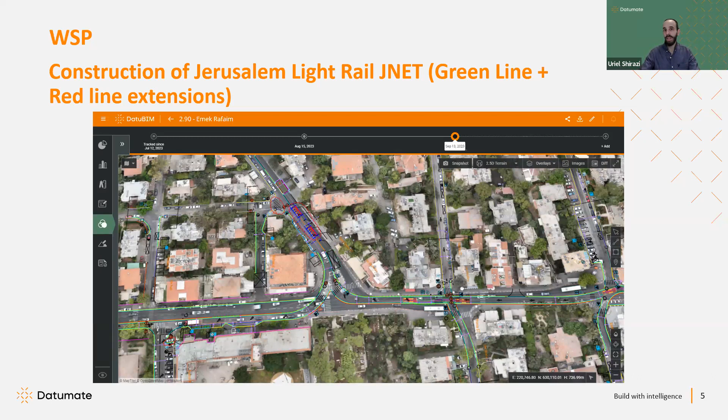WSP contacted us, Datumate, since they wanted a solution that could help solve or prevent construction errors. They wanted one platform that would be future-proof against clashes and claims, which is a big issue, as we hear from customers. And by showing a consistent view of what is happening on the job site, they were thinking that Datumate would be the tool for them.

Before I start with the real use cases, I'll share a quote from one of the power users in Datumate, Asaf Yaffe. He is one of the project leaders. He's also a civil engineer. He was, or still is, the control manager at this project. And he was telling us: working with Datumate has been a great experience. It's an open conversation between us and the company.

If I have questions, it's a very thin wall, and I can share ideas and concerns, and in one minute I have answers. We're looking forward to using Datumate more across our next projects and introducing it to our wider team across Israel, continuing to spread the gospel. And indeed, we are now starting to work with WSP on more projects. In addition to that, we also see our customers as partners. We work with them together with our customer success managers and solution engineers. They are becoming one part of their team and really an integral part of the project.

Hey, Uriel, I had a question about your experience with WSP. What's your secret for engaging with the civil engineers? I've always found that that's the hardest part. I agree. Everybody is super busy in their day-to-day.

And I think that for us, as civil engineers and people that come from the site and know how to provide better solutions and automations, just sharing our knowledge and sharing all kinds of ideas that can help our customers be more efficient is the best way to engage, to approach the customer with all kinds of ideas that will help him in his day-to-day workflows. Yeah, that makes sense.

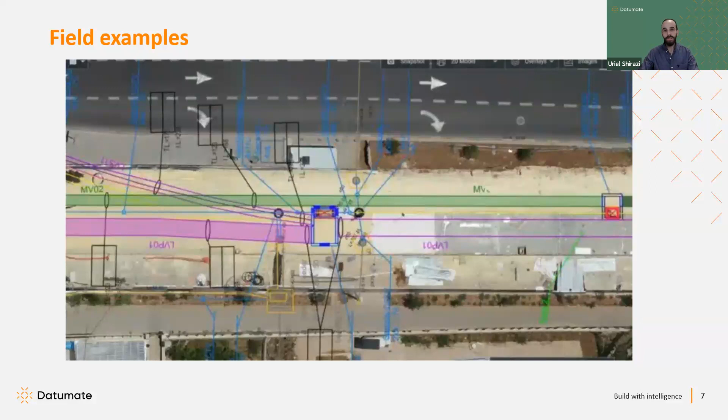So in the next few slides, we will review some of the use cases of the project. The first one is an example where the project managers or project engineers have overlaid the design of the underground stormwater. And as you can see, there is a deviation in the stormwater pit between its construction and the design. It wasn't too big a deviation to change the construction or do rework, but they could update the red lines very soon and proceed to the next stages much faster.

Instead of, as I guess most of you know, at the end of the project having this massive bulk of designs that you need to update, going over things that happened years ago. With Datumate, you can do everything on the spot and get it over with.

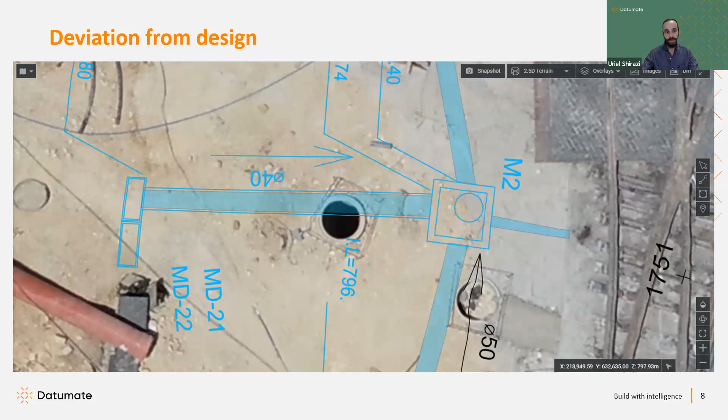Thanks to Datumate, the project team was able to construct the missing drainage channel on time rather than later, avoiding much more costly rework and delays to the project. In this case, the issue was identified by the owner that, of course, alerted the contractor. And we see that in this project specifically and in some other projects, the collaboration between the owner and the contractor becomes better, thanks to Datumate.

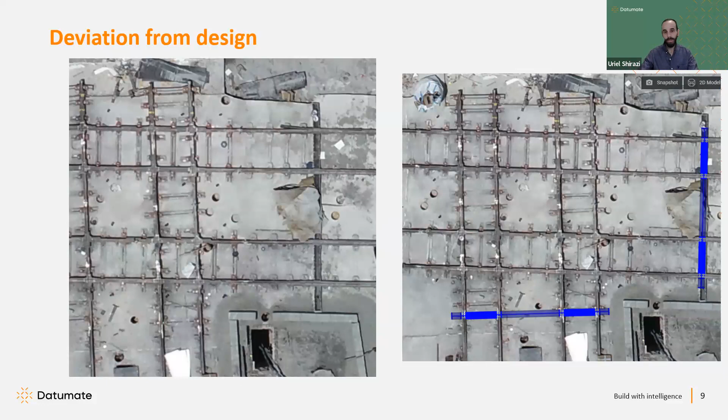Yeah, being able to overlay these traffic management plans in near real-time visualization is such a great tool. Yes, it's important also, Tom, because even if you have a surveyor on site every day, you cannot bring him to every location that you are in. And working with those designs in PDF, it's still very difficult to understand where you are when you are standing in the field compared to the design, even if you have them on your tablet. So it's still very, very difficult.

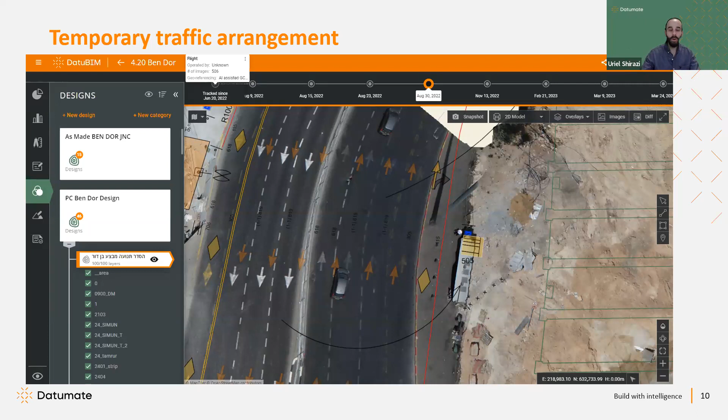So with Datumate, you can open it in your iPad, for example, or Android tablet, and then just overlay the designs, as you were saying, and just visualize the project compared to Datumate and try to understand and solve the problem on the spot. And here is another example, again, much narrower lane. In this case, we see a lane of 2.5 meters instead of 3 meters. It means that the traffic slows down, causes traffic jams more often. And again, for a project of 2.5 to 3 years, something that the city can't allow to happen.

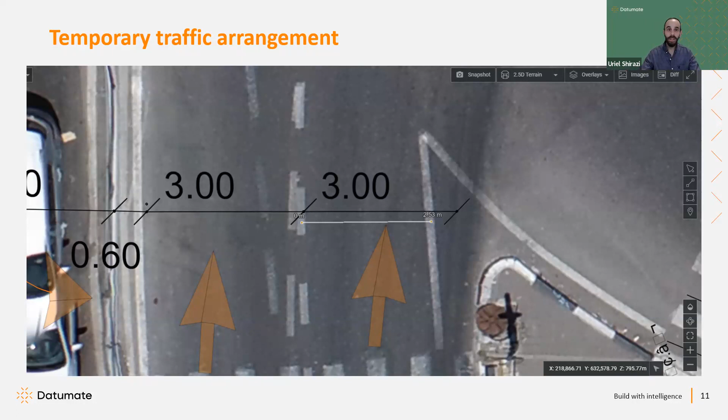As part of the project, we provided to WSP weekly and monthly progress reports as per request. These reports were given to the users within 2 days from the flight date. In many cases, we hear from customers that they get engineering professional reports, such as project progress reports, weeks and months after they had to receive them. It means that these reports have no value when they're received with a delay of a month or so.

The reports that we have provided to WSP were shared across the stakeholders of the project and the decision makers. It helped them to make much more knowledgeable decisions, fast, on time, and to be more efficient, of course, and save money, improve the quality of the project at the end of it. Such reports easily emphasize areas that are being delayed, giving the project manager critical information on time to solve problems earlier, which leads to reduced delays.

In most cases, the project managers and superintendents request such reports to track the contractor's work and to see if the work is being executed as planned and as scheduled. The contractors also benefit from these reports since they provide good indication of the work pace, enabling them to estimate when the work will be finished and manage their monthly billing in a much more clever way.

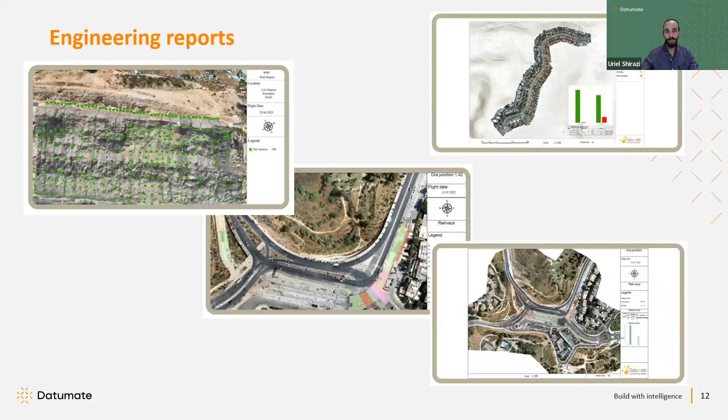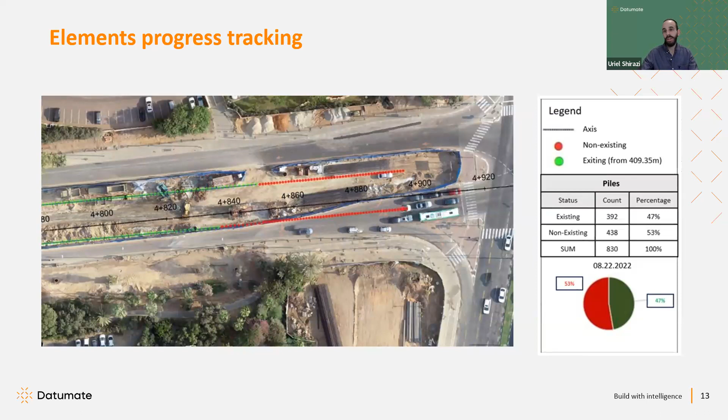And I will show you some examples of the very simple reports, but very important. So the first one is a report where we see the progress of the piles or foundations of a supportive wall, very easily color-coded and served to the user. By adding the project plan or project schedule, users can get the percentage progress and understand if they are ahead of time or late.

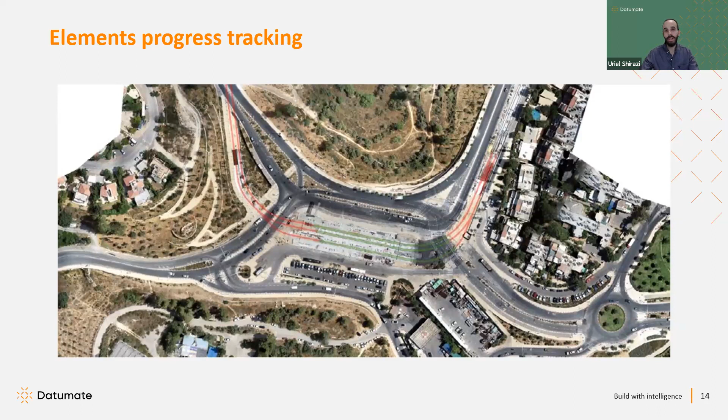The same report can be done for any element in the project, like the rail track, as we see here, or again for any other elements like walls, road furniture, and more. In this report, we see changes to specific elements between successive flights. For example, walls, color marks on the road or on the lanes of the light rail, manholes, curb lines.

The project managers get the statistics of how the contractor progressed in the specific delta time. Visualizing the changes in a very clear way gives the project manager high quality data to monitor the contractor and the construction site.

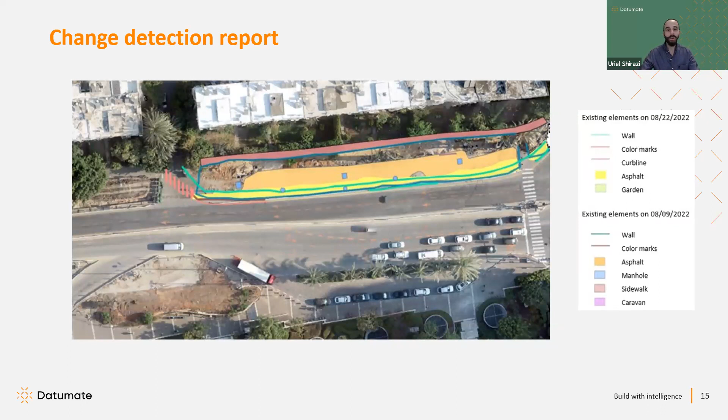Another report is excavation out of site borders. The report shows in blue the borders of the project. And the purpose of the report is to track any amount of excavation that was done beyond the project boundaries. We actually took 2 flights, calculated the delta volume between the flights in the areas outside of the blue line, and provided this information to WSP, the owner or the owner representative.

The data is crucial for the owner since it allows monitoring overpayment to contractors and protects the owner from future claims. So this is again a very, very important report. Getting it on time prevents the owner from overpaying and then starting to fight over money and payments. That's quite a headache.

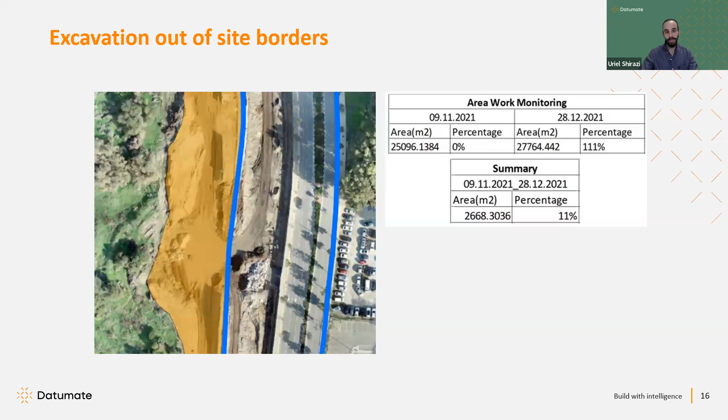Another report is for billing confirmation, and it's touching a bit on the previous reports. But one of the most demanding tasks in the project lifecycle is to submit invoices and approve them. In total, about 5 or more percent of the project budget goes to billing processes. Usually, the general contractor pays about 3% of each invoice on the work that is related to billing.

In this case, the report is used for tracking the amount of different materials that have been excavated or filled. It's a cut and fill report for different materials. It was used by WSP to verify the contractor invoices throughout the project lifecycle. Paying only for what has been done in the job site is very crucial for managing overpayment and keeping the project on time and on budget.

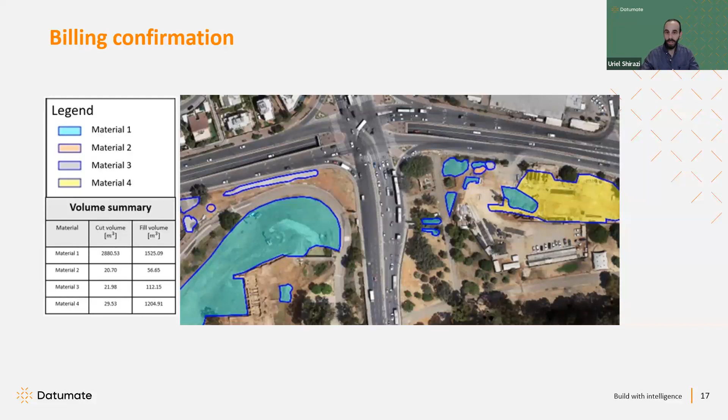With this easy and automated report, owners can save large amounts of money, especially when speaking about earthworks, which are very expensive, including the labor and the materials. So a quick summary of what we learned about the WSP project and the benefits of Datumate.

Quality control: WSP, as well as other stakeholders of this multi-year complicated project, can now log into Datumate. They can look at plans and see at a glance what happened until now compared to the schedule and to the design. It makes quality control seamless. All of them have full and accurate visibility of the job site.

Everybody can see what is happening every time, especially the ones at the office that usually do not have this opportunity and point of view. They don't get to the site every day or every week. Stakeholders can see up-to-date reports and visualize the progress with ease.

Better collaboration. As I have already mentioned, WSP uses Datumate reports in team and status meetings, and also shares them with different employees in and outside of the company, as well as with the contractor. So all of that together makes collaboration much easier. And of course, everybody can work from any place in the world.

Time saving: historically, to take measurements, stakeholders would need to go on site, send surveyors multiple times to manually complete the work, and surveyors and schedulers to update the project status. With Datumate, everything can be done remotely and automatically. Intuitive interface.

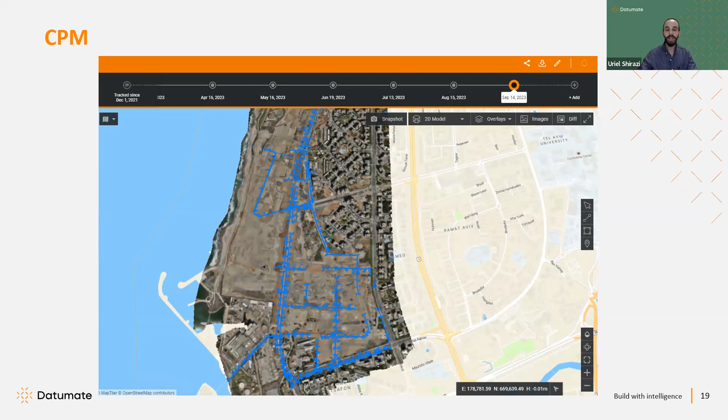We were speaking with David Haynes, who is the project manager of CPM, and he told us that Datumate allows him to track his work conveniently and quickly from design to completion. Haynes believes that it's only a matter of time before this type of technology will be used for all infrastructure and construction projects in Israel. I can add also the world, of course. And all project owners, managers, supervisors will use digital software to monitor progress and get access to real site data.

And the values that CPM gained from using Datumate are transparency and better collaboration. Prior to implementing Datumate, CPM had to rely on physical designs during the weekly and monthly meetings with the owner and the general contractor to present the project status. This made it more complex to demonstrate progress, and it was often challenging to locate the most updated designs. With Datumate, CPM can now easily present the project status to all stakeholders involved, enabling informed decision-making based on accurate site data.

Grid elevation measurements. Datumate is used to measure grid elevations on specific dates and verify measurements provided by the contractor. In the past, this process involved sending a surveyor to the site using traditional methods such as total stations and RTK GPSs. Now it can be done quickly, accurately, and at no additional cost, helping to prevent conflicts with the contractors by clarifying and identifying all the deviations, and of course supervise the monthly billing.

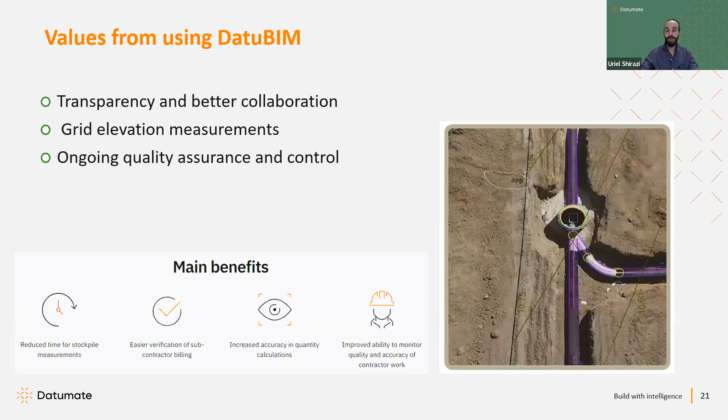Another benefit is the ongoing quality assurance and control through comparison of execution to design and planning. For instance, when it comes to drainage channels, as we earlier saw with WSP, the platform is used to easily verify whether they align with the design. This is achieved by uploading the design of the platform to Datumate and comparing it to the actual execution in the field.

And some more benefits and values. Another one is the improved accuracy in earthworks calculations and verification of contractor billing. The platform enables precise measurements of stockpiles, allowing for easy comparison with previous dates or the final design, the final grading, to determine the remaining work and the progress of what was already done.

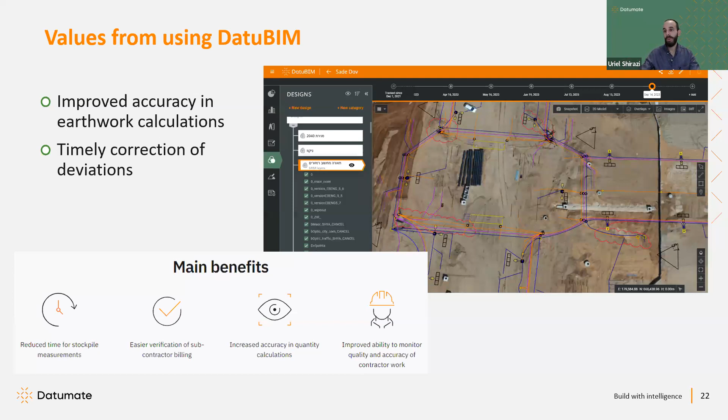Contractors are aware that the platform is being utilized. So the platform serves as a kind of a barrier, as the contractors know that they are being monitored and the measurements are being verified by the owner. So it's a kind of tool to make sure that no one is doing monkey business. Timely correction of deviations. By using Datumate, deviations are promptly identified and can be corrected in a timely manner, eliminating the need to wait for contractors to report these deviations at a later and more dangerous stage of the project.

That's on my side so far, Tom. Going over to you. All right, thanks, Uriel.

Yeah, I will mention I have a client I'm working with in Nevada, and he thinks that he's able to get his return on investment from the Datumate platform in as little as 3 flights on these large earthworks projects. He can save so much money by monitoring his subcontractors. So it means that if he has one site, it's like in 3 months or even less, he returns the investment over the platform. And if he has 3 sites, it's like in 1 month. So you don't need to wait years or very long months to see the ROI with Datumate.

Thank you, Tom. Good comment. Awesome. Well, let's jump right into a demo now.

Perfect. So I'll speak about the platform itself. Datumate is a cloud-based solution, meaning that you can log in from a computer or tablet with an internet connection anywhere in the world. Once logged in, you're going to see all the projects assigned on a map, and you'll have access to a digital notebook on the left side for more information and images of the projects. Let's choose one of the projects and visit it. In the center, we see the 3D model from the given date.

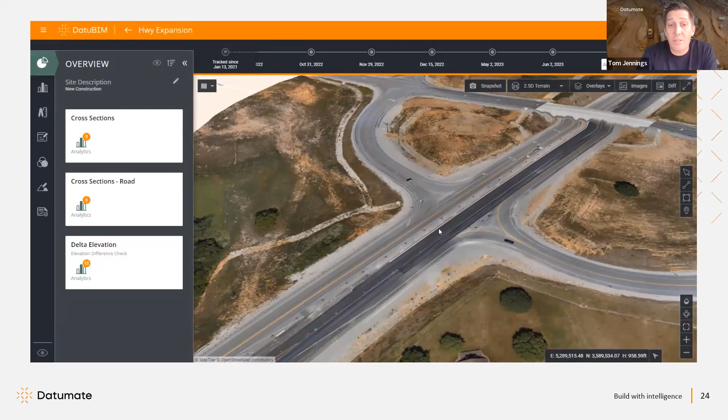At the top, you can see the timeline, and each of the bullets is another flight. We can track and manage our projects in a very efficient manner with this. On the right side, we see the toolbox with line tool, polygons, and point tools. On the left side, we've got a digital notebook with our analytics, measurements, annotations, and our design files.

In Datumate, in order to add another flight, the user is simply going to click on the Add Flight button in the top right. We upload the drone images, CSV file with our ground control points, and it's a completely automated process. What I really like about Datumate is that no one else is going to see the data or interact with it. It's a completely automated workflow.

Yeah, and even if you share your links to your project with your customers or other people outside of the organization, they will have to use a username and password. So all of your information is secured in AWS servers. So you can rely on that.

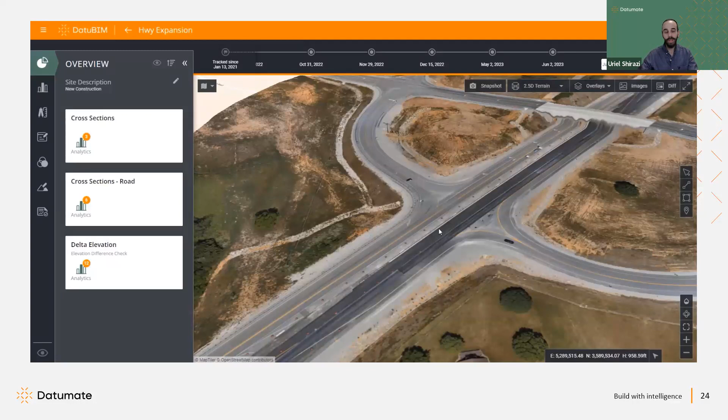Yeah, so I'm about 10 months into a postgraduate course on artificial intelligence with Python at the University of Texas. And I am really excited about all the opportunities to implement artificial intelligence into the construction industries. Detecting things, objects, and point clouds, training models to improve analysis for infrastructure construction.

At Datumate, we are already using artificial intelligence to auto-detect and mark the center of ground control points. We have trained a model to identify all of the major symbols used to mark control points. One of our clients preferred to use chevrons on the ground, so all we had to do is train our system to identify these new markings. Right away, your UAV and survey teams are going to experience big time savings when our platform is marking control points for them.

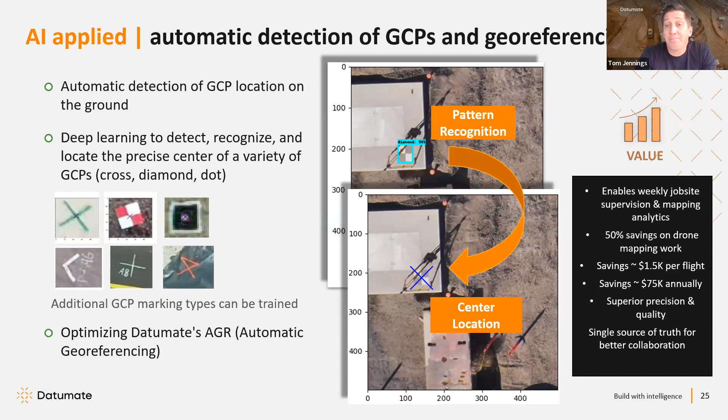So as the construction industry continues along this journey of digital transformation, there really are tremendous opportunities for companies to streamline their processes, increase efficiency, and retain their competitive edge. Datumate's virtual ground control points save valuable time and money while maintaining the survey-grade accuracy of construction site mapping and modeling. Let's think about how we can use real-time kinematics and virtual ground control points to save time on the job site.

So the initial setup involves laying out physical GCPs and manually measuring their locations. The Datumate AI engine automatically identifies the physical GCP marking structure and center points. Beginning with the second flight, the Datumate automatic georeferencing algorithm identifies features existing in both flights and creates a set of virtual ground control points. In every subsequent flight, a new set of VGCPs is created based on data gathered from the previous flight, eliminating any further use of physical GCPs.

So, as noted, the virtual ground control point relies on the power of AI-driven automatic georeferencing and image processing algorithms. As soon as the Datumate system creates the 3D photogrammetric model of the construction site, it begins matching up images and features that it recognizes from previous flights. We call these natural monuments. The more often flights occur, the more information the system can process and learn about the location, ensuring that the models take into account any changes to the terrain over time and remain enduringly accurate.

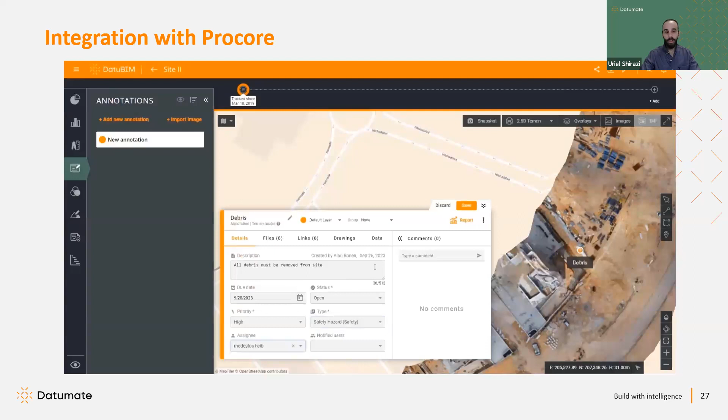You can change the date, the priority, the type. There are many types. Assign it to the relevant stakeholder in the project and save it. Of course, this annotation is being saved in Datumate, but more importantly, it automatically will be exported to Procore as an observation, and all of the Procore users will be able to see it with all the details, dates, and

also to add comments. It means that communication can be done between Procore users to Datumate users, even if not both of them have access to Datumate. So every comment that is added to Procore is being populated in Datumate annotation card immediately. It means that, again, collaboration and communication, tracking issues and observation, punch list, or any other items is becoming much, much easier due to this integration.

We have completed this integration in the past few weeks, and we are now working on more integrations with other platforms. So you don't have to worry that your data that you generate in Datumate lies in Datumate. You can export it. We know that we are a part of the chain of the construction project, and we help our users to streamline their processes when they continue to work in other solutions.

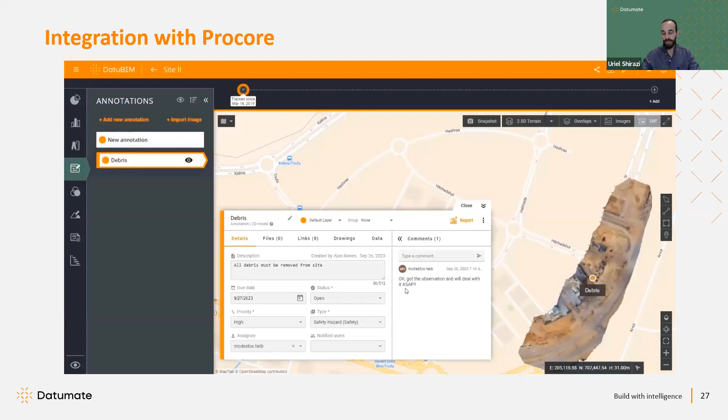Yeah, I think the Procore integration is really going to be valuable to our clients. Yeah, I agree, and I assume we'll share some more information in the next webinars.

Well, thanks, Uriel. So now let's jump into design files. So one of the real differentiators for DatuBIM is the work we do with design files. DatuBIM supports multiple design formats such as DXF, DGN, DWG, LandXML, and IFC. Let's see, in this example, you can see a road design overlaid on the 3D model generated in DatuBIM.

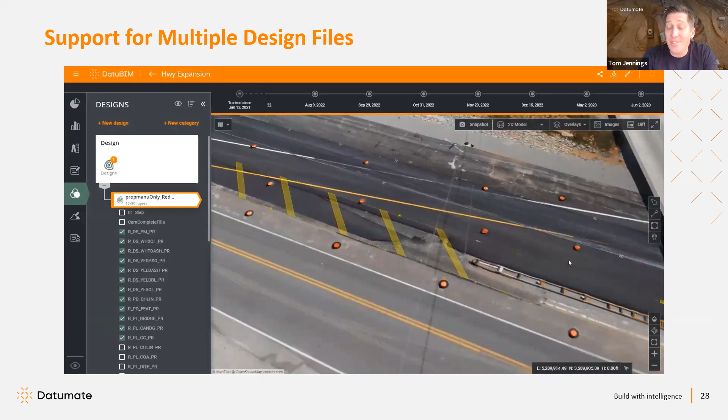Each layer in the design file can be turned on or off so we can focus on the layer we are working with. Typically, I like to focus on the alignments and the stationing so that we can measure offsets, alignment obviously being the backbone of the project. In the next example, we're going to take a look at a 3D IFC file.

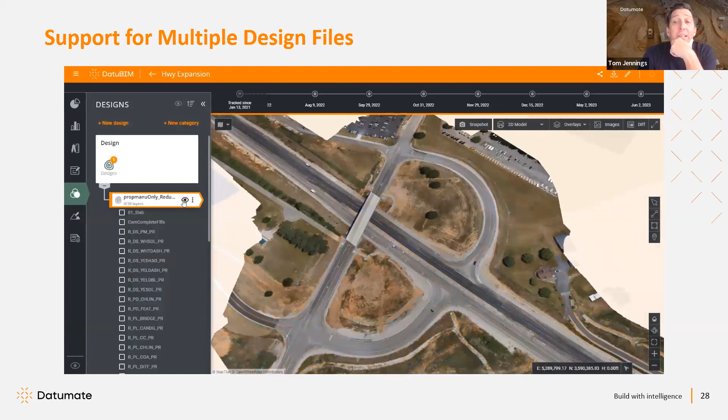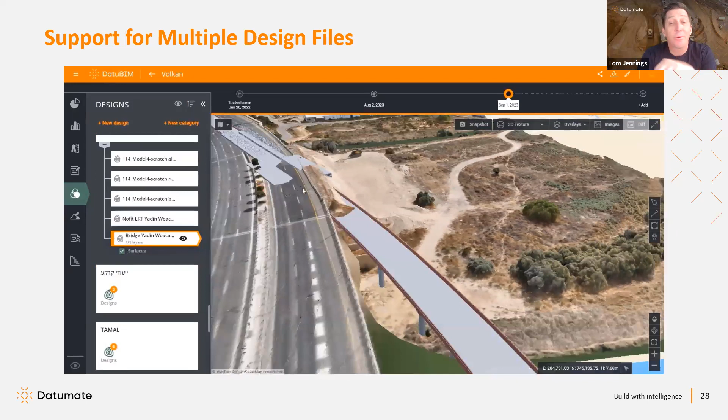So I'm really excited about IFC designs. We can import buildings. It's just a great way to visualize what's going on. Owners love to see the 3D designs displayed in the existing terrain. Gives you a real feel for what it takes to build a design.

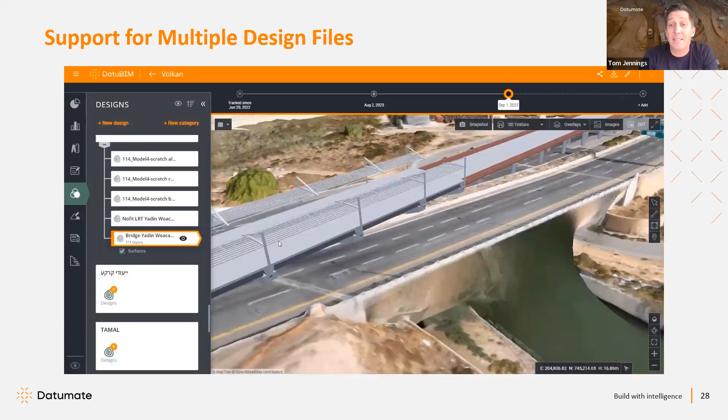Today, the 3D design is used to visualize the project, but in the very near future, we'll be able to make measurements against it, be able to pull cross sections and see what's going on underneath the surface. Huge value there. So making volumetric measurements inside DatuBIM is fast and easy, and more importantly, reliable and repeatable.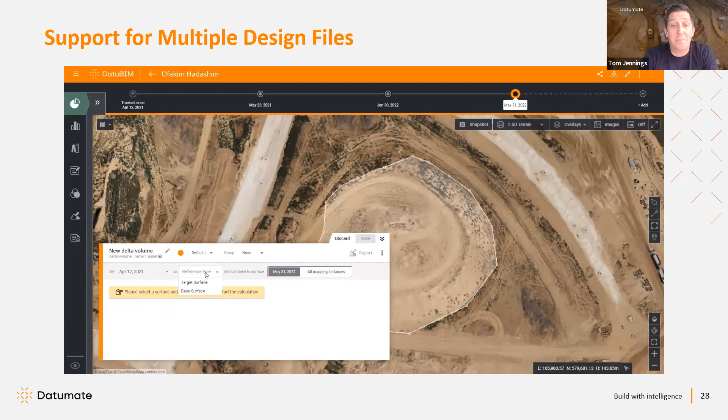We can use the polygon tool to outline this stockpile and have an accurate measurement in seconds. This is a real time saver for project managers who need to report on quantities at the end of each month. Surveyors can also use the Delta elevation tool to identify specific elevation changes across the project.

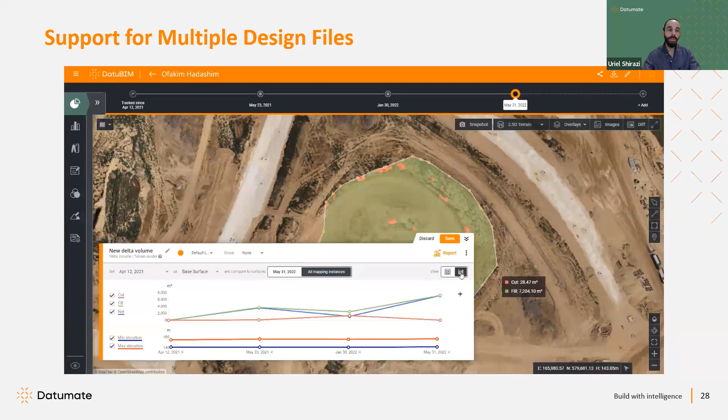So you can see that we can also graph the data and add the other flights to be able to make these kind of comparisons very quickly and easily. Yeah, very important. And the volume can be compared to any other surface, such as designs or surfaces that we have imported or previous flights, or any elevation that we type in. So that's a very important tool. Yeah, even though it's quite basic, but super important.

Yeah, to be able to make comparisons to the subgrades and the finished grade is just a real value proposition. Yeah. So, right in line with that is our professional reports. Datumate offers a suite of tools designed to make measurements and analytics simple and effective.

The Datumate cross-section analytics tool allows our users to make a cross-section of any surface to visualize the elevations. You can then add other design surfaces or flights from the project so that you can monitor change or track progress. Our clients asked to create a cross-section volume report for the entire road project, and we put our team to work on that.

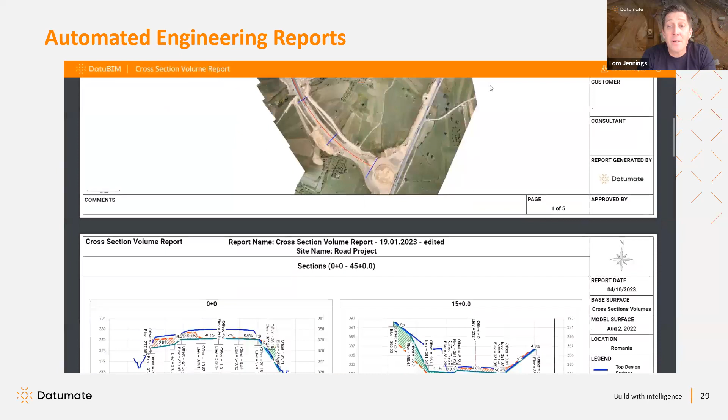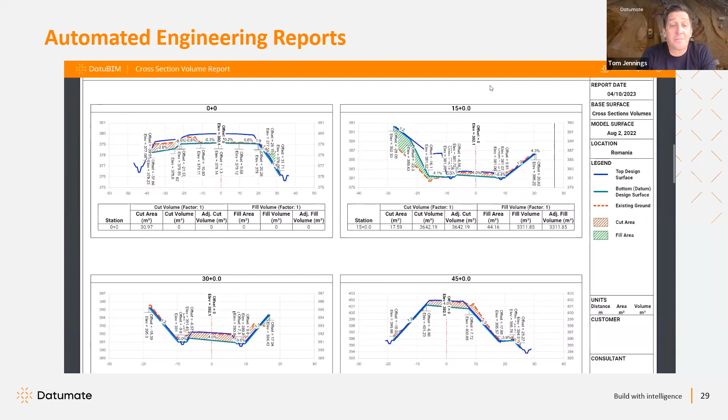We are using the power of machine learning to bring automated engineering reporting to the infrastructure construction industry. A key benefit of automating reports is the amount of time it saves in manual data wrangling processes. The removal of these manual processes frees up significant time for key staff, allowing them to focus on more important activities that enhance business insights and drive better decisions. I like to think we are putting machine learning to work, taking mundane and tedious jobs off the plates of engineers so they can focus on what's more important.

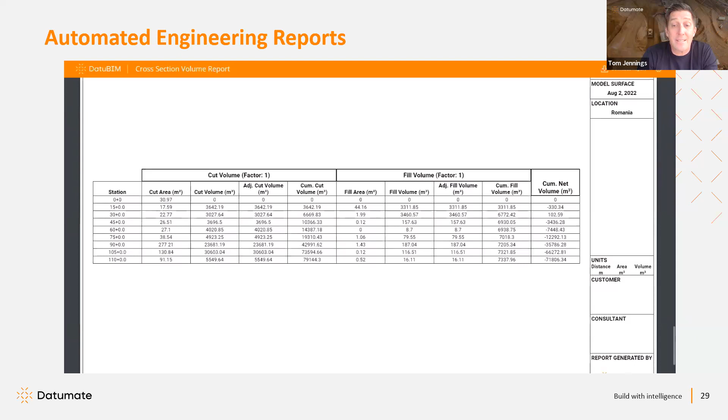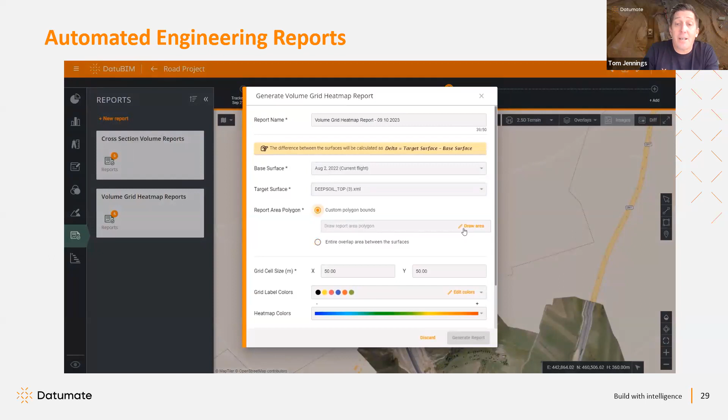So the cross-section volume report will generate tabular and visual volume calculations on the finished grade and subgrade surfaces against the existing 3D model. Now that the tool is automated, the report can be automatically generated as needed during the life cycle of the project. Very similar to the cross-section volume report is the grid volume heat map report. Moving earth is incredibly expensive, and we are giving our clients tools to perform mass haul analysis before the projects even start.

Another automated report that Datumate is working on is things like grade checking. The grade checking is an important task in road construction. Since the road is built from layers over layers, the construction team must verify that it is built according to the design before progressing to the next one. Datumate allows its users to easily compare between the as-built, either from the 3D model or from traditional survey, to the design of the different layers.

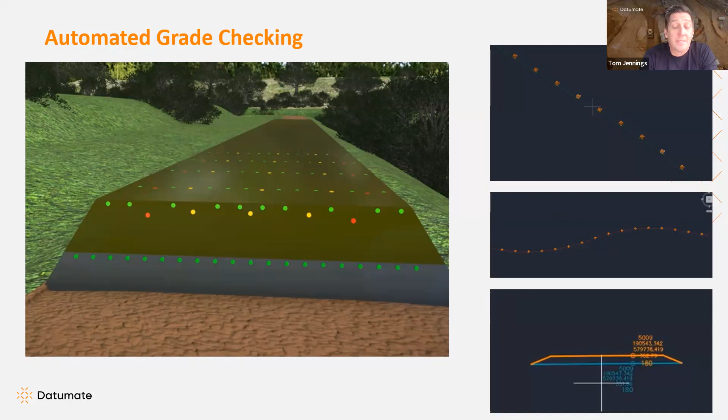Datumate then provides an automatic report showing the delta between the design to the as-built. Once the delta is small enough according to the project standards, the team can progress to the next layer. This report and others save hours of work on the site and back in the office. Thanks, Tom. And this is something that we keep saying and echoing. We try to automate processes, and we want to save time for the people on site. That's very important for us.

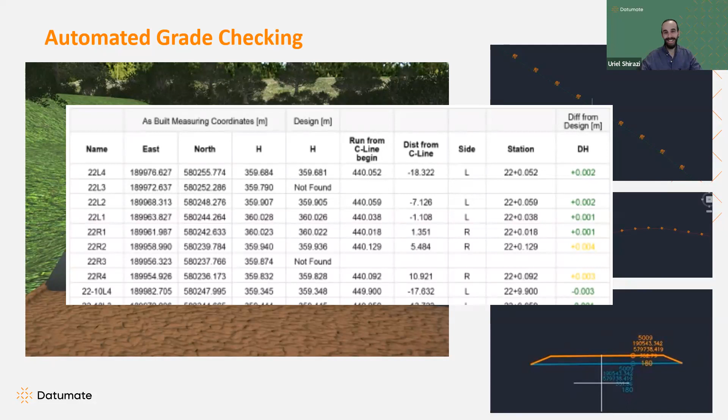I mean, who doesn't want to spend a little bit more time playing golf or playing with their kids, right? Definitely. Yeah. I think we covered the...

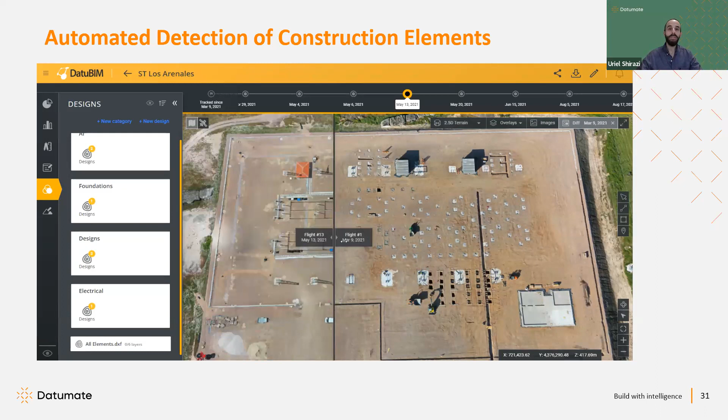Yeah, I wanted to speak a bit about some more AI. And I wanted to share what we've done with one of our customers that is building dozens of substations a year. So together we have identified some elements in their substations, energization elements, and we have trained Datumate to identify their different stages and generate automatic reports after each and every flight.

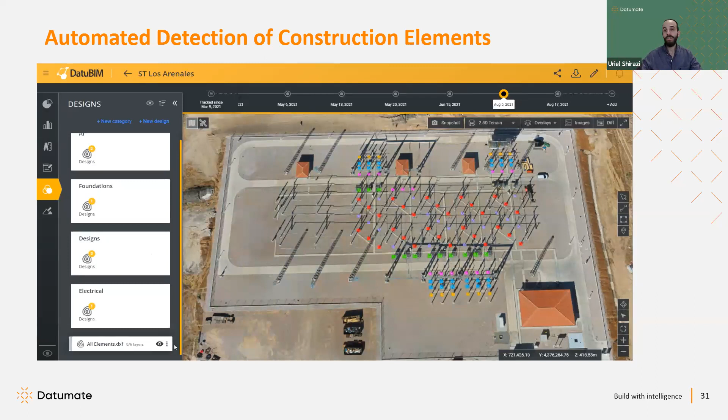And it was done more or less by getting images from our customer of the different stages, as you can see here, the ground and the excavation, different stages of excavation, and concrete, different types, and later the steel installation and the electrical component itself. We also received the 2D design, and the 3D, or let's say the faces of the energization elements. Then all of it together with the point cloud and the information we got from the drone allowed us to generate automatic reports after each and every flight.

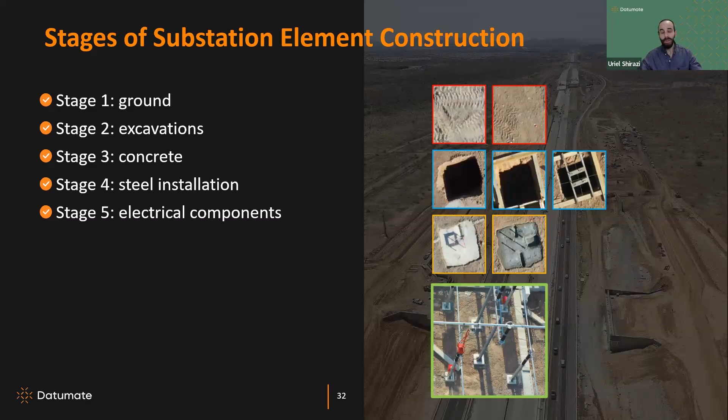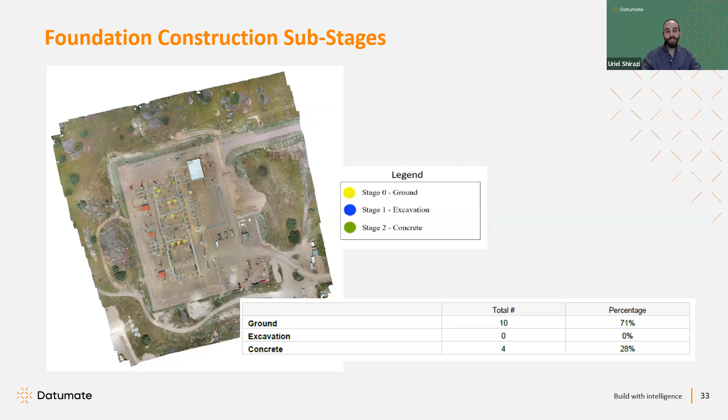For example, this report shows the foundations of the project. So 10 foundations are in the ground stage, no foundations at all are in the excavation stage, and 4 piles were cast with concrete. Or this report, for example, provides the following information: foundation completed in 14 elements, erection of the steel structure was completed in 4 elements, and 93 elements were fully installed. These are only a few examples of the automations that Datumate can bring to the construction industry using artificial intelligence.

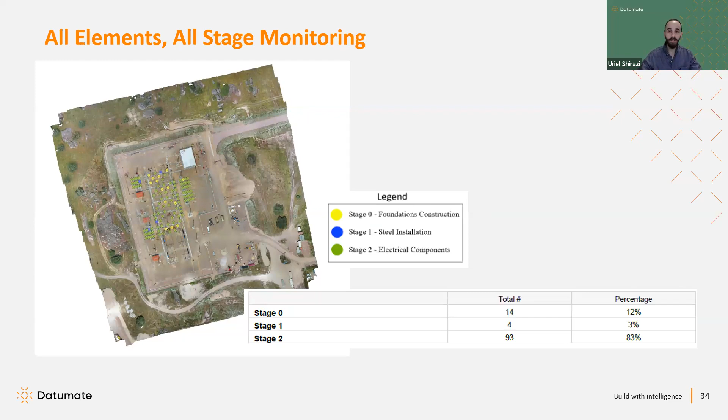So, Tom, maybe you'll speak briefly about the 4D, and then we can jump to Q&A. Yeah, absolutely. We want to save some time for questions. I'll just touch briefly on what the next step is for DatuBIM, and it's our support for 4D. It means that users can upload the schedule to the DatuBIM platform from Microsoft Project or Primavera P6. Users can view the Gantt chart and the tasks, the critical path, and the amount of work that has to be done.

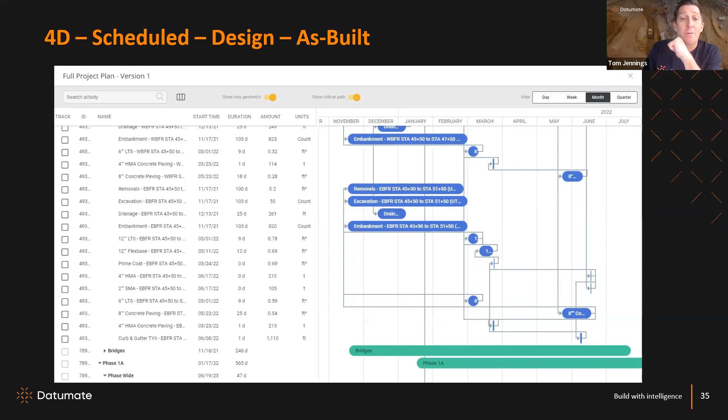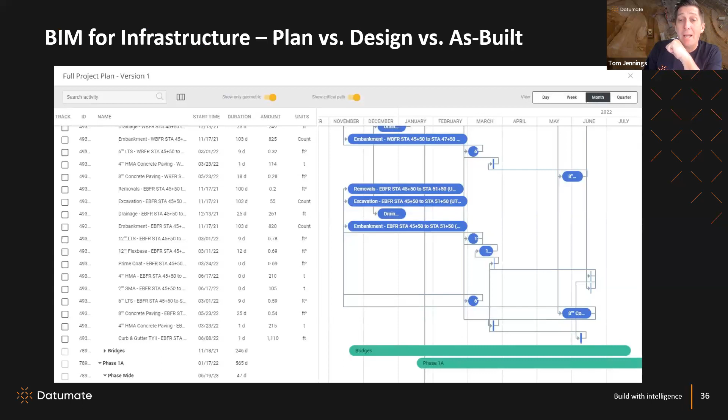DatuBIM will allow users to tie the plan and design they have uploaded into DatuBIM to the 3D model. In this case, we see a linear task, for example, excavation. The user can connect the design of the task to the Gantt chart. And then DatuBIM provides the real progress in red compared to the planned progress in gray. This allows us to better monitor and track progress on the job site. Sorry, Tom, continue. Oh, no, go ahead. I think it's going to be a really great tool for project managers.

Yeah, simply throw in the MS Project or the P6 Primavera, and then get automatic updates on the progress from DatuBIM. That's again spending some more time with the kids, or playing golf or skiing.

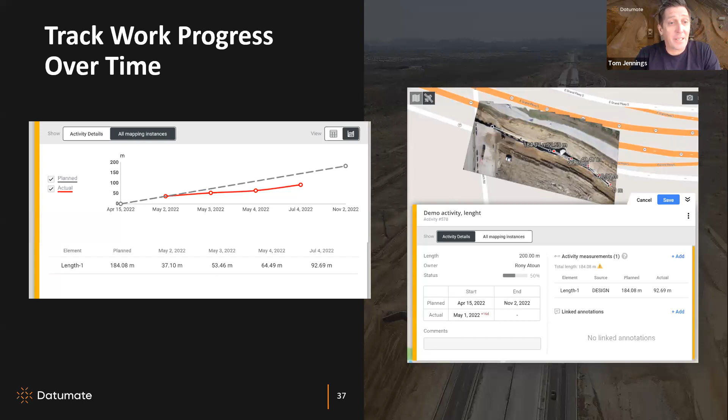Tom, you like skiing? Ski season's coming, that's for sure. I'm excited. Perfect. Not here, not for me.

So yeah, I think we had a very interesting session. I'm not biased. We showed you today some real use cases from real projects, real customers, how they use DatuBIM in their day-to-day, as well as some of the DatuBIM capabilities. And now let's go for the Q&A section.